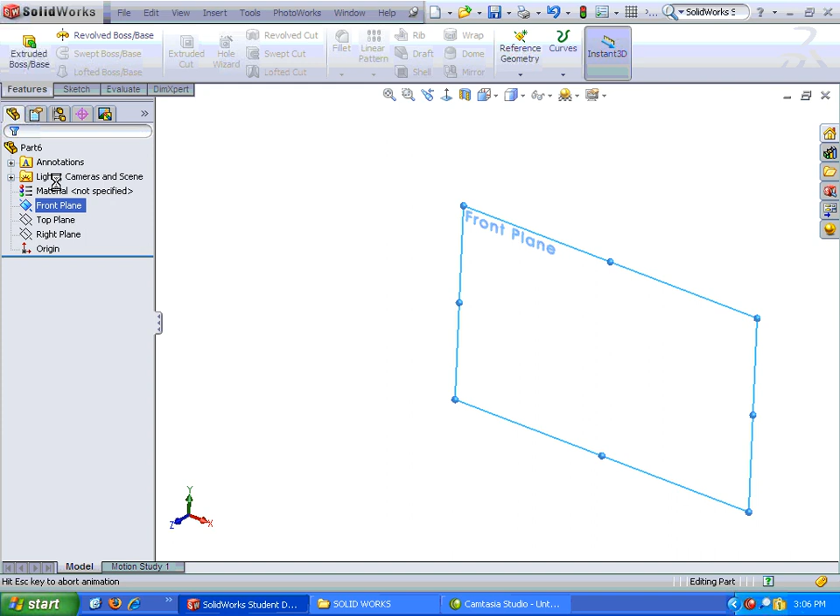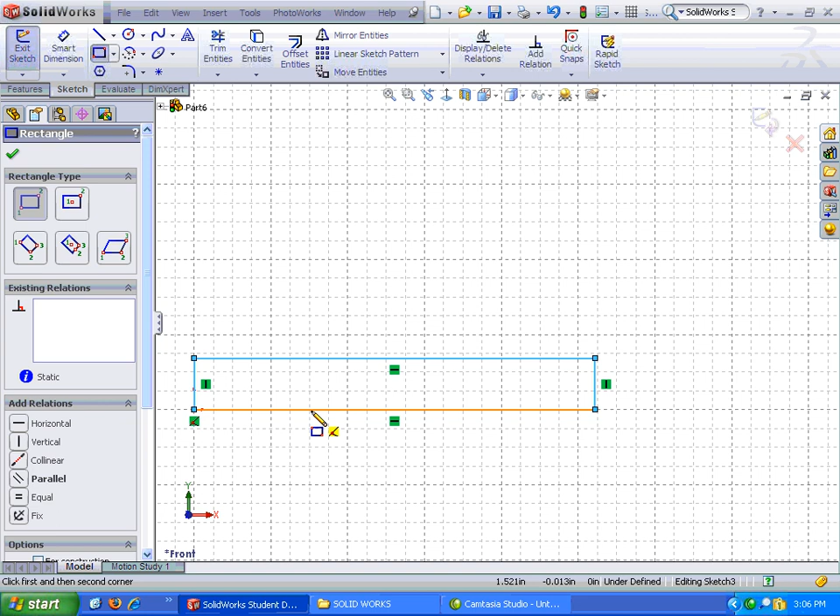I'm going to start on the front plane. I click on the front plane and immediately click Sketch, which brings the front plane into view. I'll start with a rectangle, so I right click, corner rectangle, and start it on the origin, stretching it out approximately the size of my profile.

I'm going to dimension it later. Now I'll take the line command and sketch in a couple of lines. Again, it doesn't really matter exactly where, since we're going to dimension it later. I'll draw this in down here.

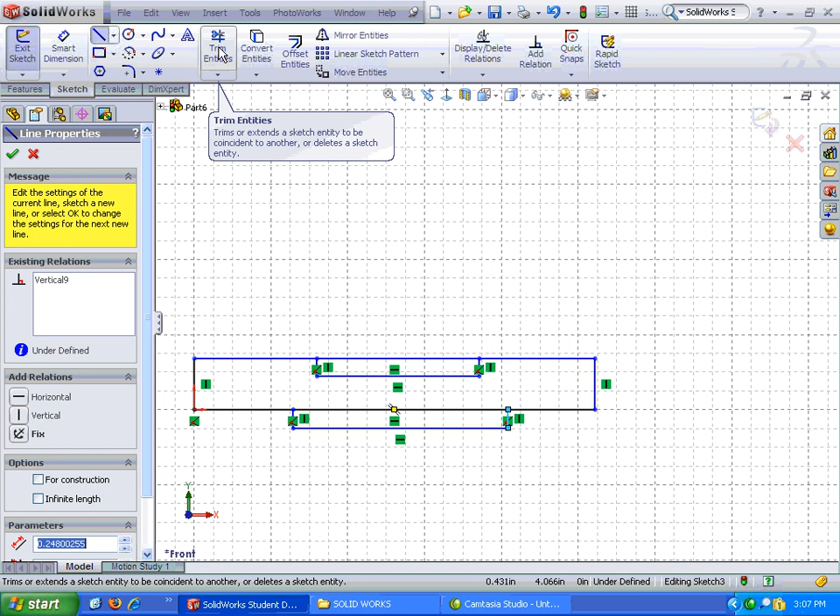Now I need to delete a couple of lines, so I'm going to use the trim command, located on the tool palette. I like to use trim to closest, which gives me the scissors. I can also use power trim, where anywhere I hold down the left click button, it will erase whatever the cursor comes in contact with.

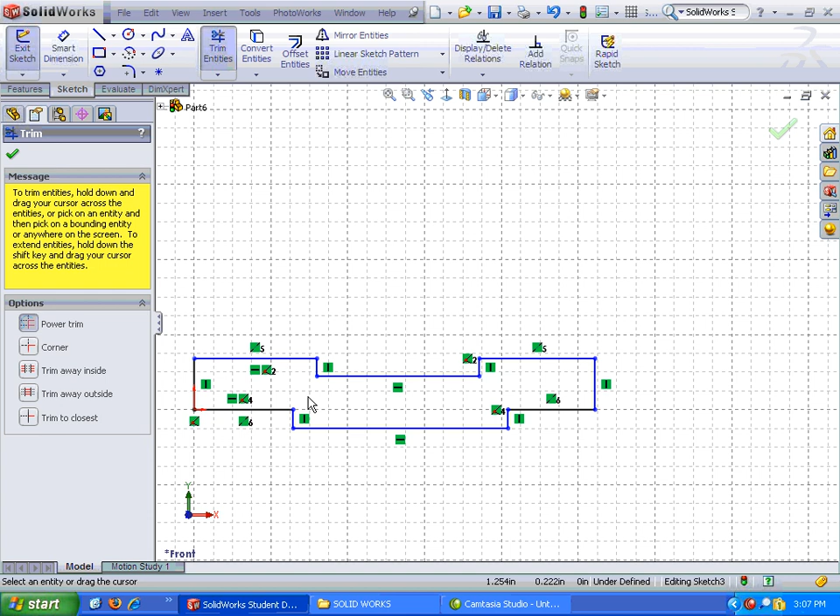So there is my profile, and now I can start putting some dimensions on it. Let's get out of trim. I can either select Smart Dimension from the tool palette, or right click and choose Smart Dimension.

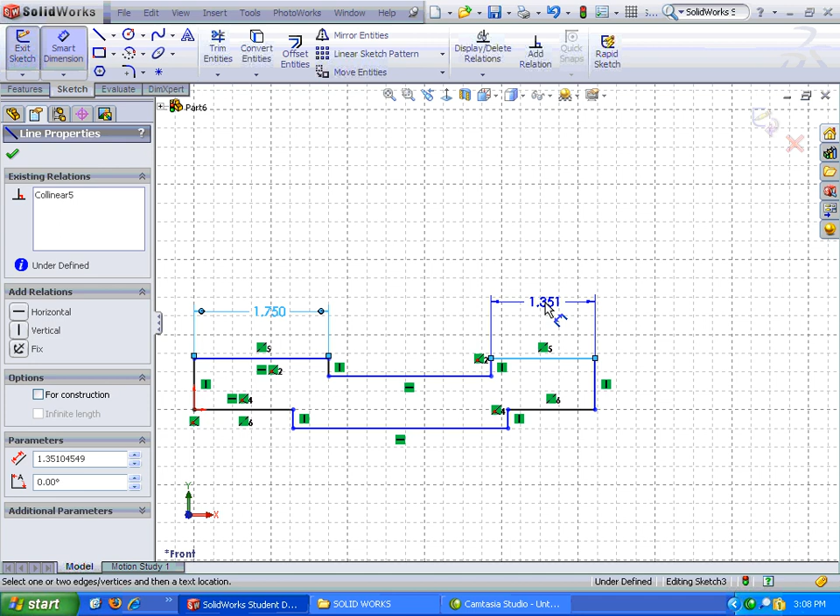Let's start dimensioning some of this. This is 1.75, and the other side is 1.75. Now let's go ahead and put the overall dimension in here, so I click line to line, or I could go point to point. The overall is 5.25.

This line is 1.5, and the other side is 1.5 as well, or we could do the middle one. Either way, I have this one dimensioned on the plan, so let's go ahead and do this one: 2.25.

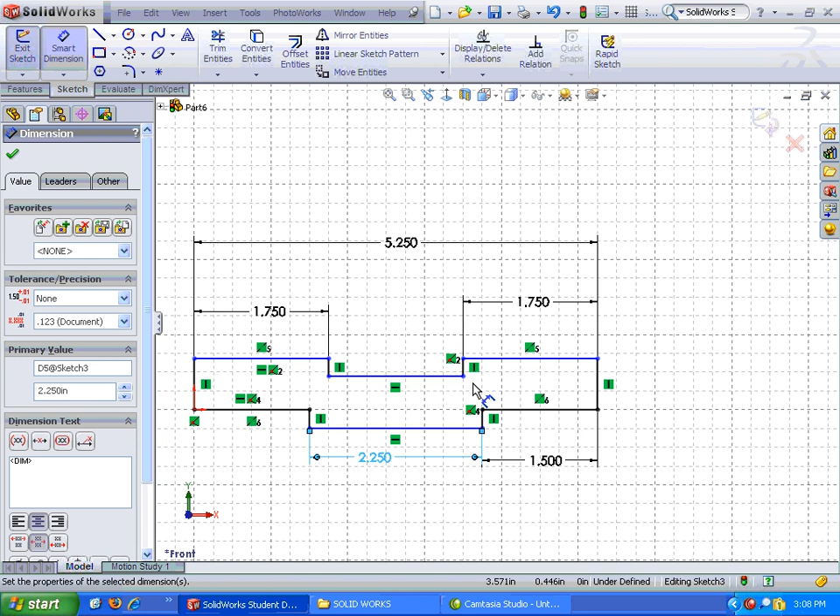Now we need some vertical heights. I'm going to take this little line right here and dimension it to 0.125. We'll take the other little line right here and dimension it to 0.125 as well. Then we'll take the whole thing and dimension it to 0.625.

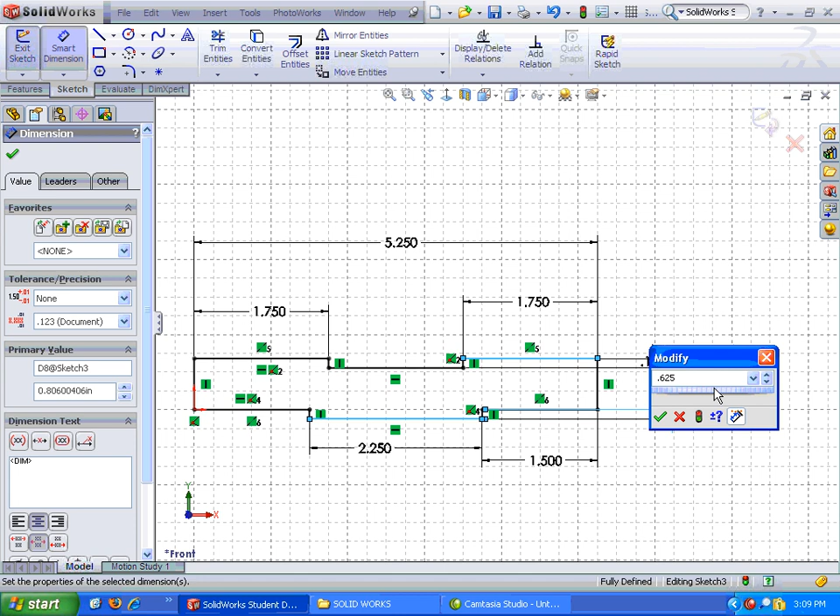There we go, and we've locked everything in place with those dimensions, and we're ready to extrude. To extrude it, we go up to the Features tab on the Command Manager, go to Extruded Boss Base, and type in 3.25.

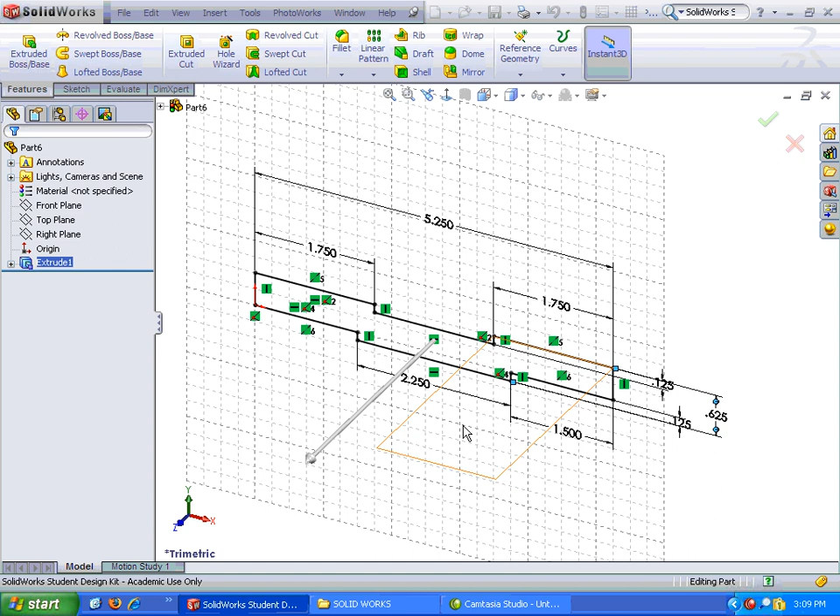And click the check mark. So there is our base feature. Let's put some fillets on the corners of this. The fillet command is on the Features tab, Fillet, and my fillet radius, I believe, is 0.5.

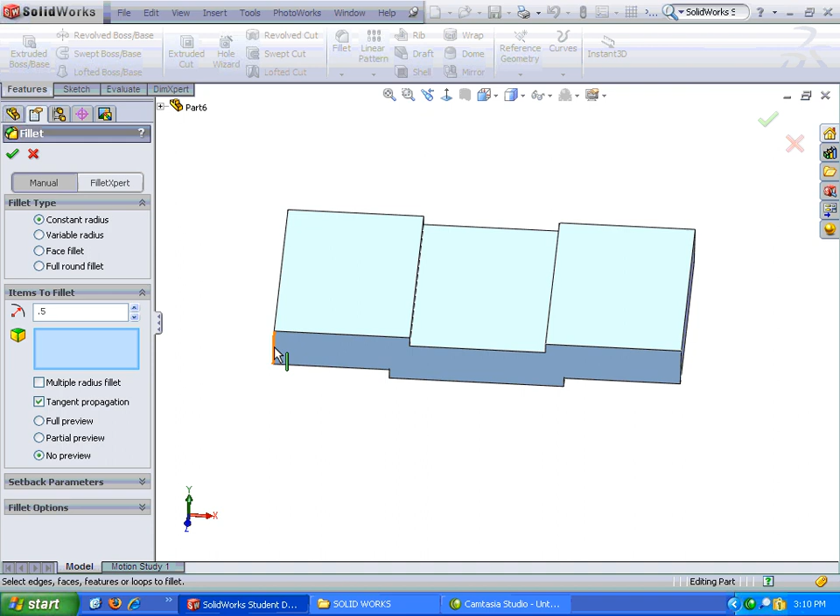Right here is where I'm going to select the edges. I'm going to select the edge, and let's turn on full preview so we can see what it's going to do. I'll hold the middle scroller down and rotate this so I can select the other side. Now I have my fillets all in there, so I'll hit the check mark.

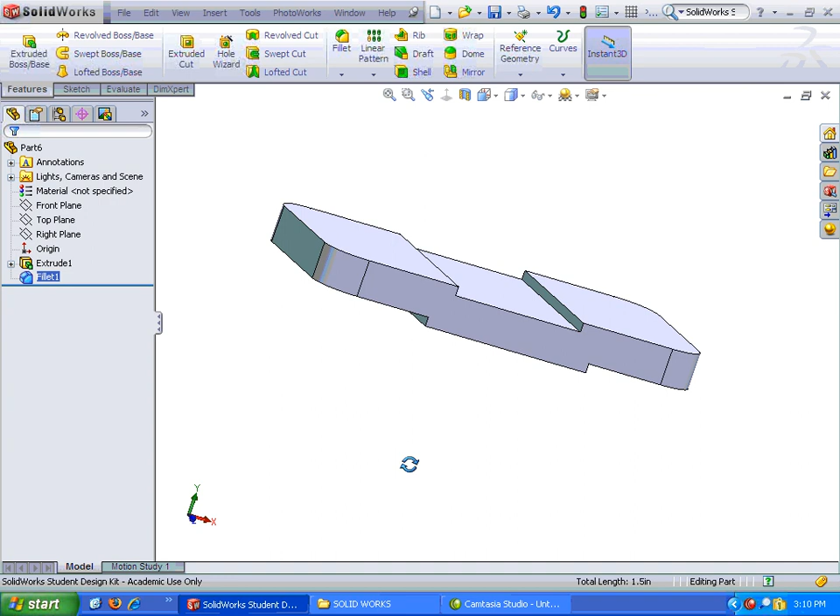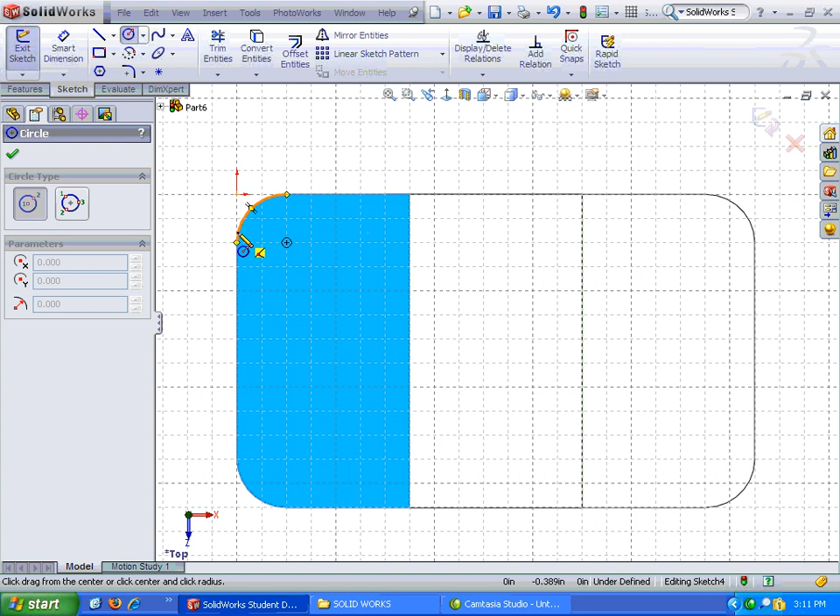The reason I put the fillets on is that it gives me a center point to tie my circles to. So I'll click on a surface, turn that surface normal to, right click, turn on a sketch, right click, and draw some circles. As I hover over the fillet, notice that the center point comes up.

I can then tie my circles to those center points, so I hover and click the center point to put these circles in quickly. Notice I'm not giving them a size yet, just clicking some circles in. I'm going to smart dimension one of them to 0.375.

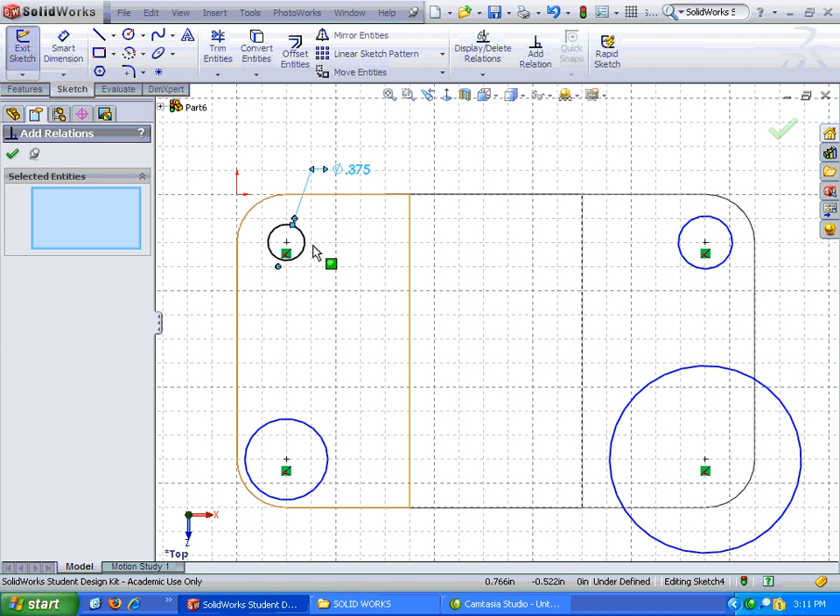Now I want all of the circles to match this dimension. I could go around and dimension each one, but instead let's add a relation to them. I'll go up to Display Delete Relations and drop down to Add Relation. I click on the first circle and highlight the other circles, notice it puts them in the box, then choose Equal, which makes them all equal. Once done, click the check mark.

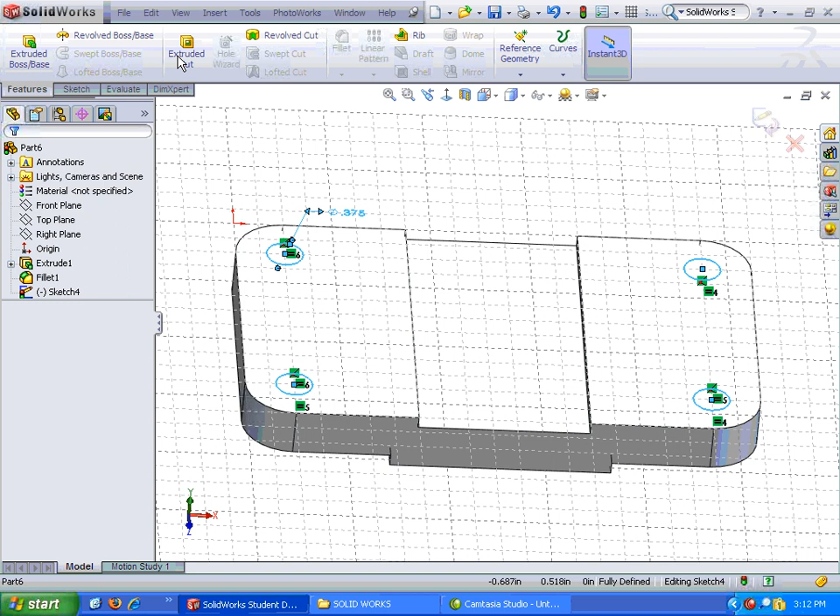Now I'm ready to cut these through. Let's rotate that so we can see it. That's under the Features tab, Extruded Cut, and it will select all 4 circles. Let's just go through all and hit the check mark. And our top plate is now finished and ready to be saved.